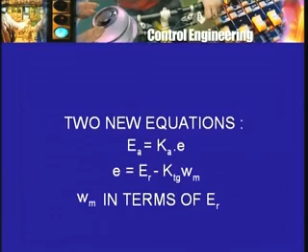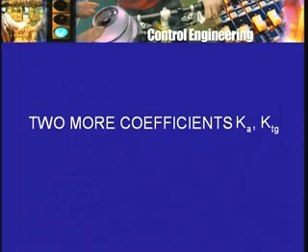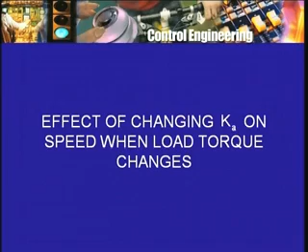In this expression what other terms will appear? The parameters of the drive will appear, that is, the armature resistance, KB and KF, the coefficient of friction, will appear as before, but in addition we have two new coefficients. We have the so called gain of the forward path Ka, which relates the armature voltage to the actuating signal E, and the feedback signal coefficient KTG, which relates the feedback signal to the output quantity omega m. So we will have two more coefficients, Ka and KTG, and what I asked you to do was to see the effect of changing this Ka on the value of omega m when the load torque changes.

When the load torque is at the rated value, the motor will run at the rated speed, there will be no steady state error. Therefore the value of omega m will be the desired value of the motor speed. But when the load torque is not at the rated value, then the speed is going to change. The question was by how much, and in what way will this coefficient Ka affect the steady state error in speed when a disturbance takes place. This disturbance is a change in the load torque. Of course the other coefficient, K tacho generator, which appears in the equation for the feedback signal, also will affect the steady state error.

Now, as I said, these are all steady state calculations, and this is not enough, because the conclusion that we will draw from this steady state analysis will be that the greater Ka is, the less will be the steady state error, and therefore one would be tempted to increase Ka to as large a value as may be practically possible, in the hope that the steady state error will be reduced to a very, very small value.

But I mentioned that this Ka has an effect on the transient error, and we have not looked at the transient performance so far, and that is something which has to be looked into, and we will do that. But before we do that,

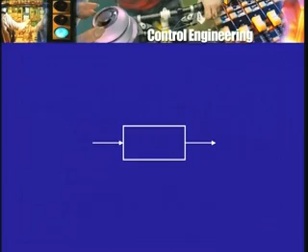The gain formula, as I told you earlier, arose out of Mason's study of signals, that is various physical quantities that are associated with a system which consists of a large number of interconnected subsystems. At that time already the idea of a block diagram was commonly being used, so that was not anything new. Engineers had started using block diagrams such as we have already used. And as I told you, the block diagram really enables us to concentrate on only a few signals associated with what is represented by that block.

For example, when we represent the motor and the load by a block, perhaps the only relevant signals, as we saw, were the armature voltage, the speed, the load torque, and perhaps the armature current, if it might be of some interest or use. Other quantities we don't write explicitly. Also, with this block, ultimately we will simply associate an equation or two equations which express relationships between these signals. Now, the technique introduced by Mason goes a little further.

One can look at the simplest case where you have only two variables or only two signals or only two quantities associated with some device or with a system. You can think of one of them as the input quantity and the other as the output quantity, depending on what particular significance those quantities have.

But if you are only interested in the relationship between these two quantities, then sometimes it does not matter which one is regarded as input and which one is regarded as output, if you do not mean by input and output literally that input is what you are going to change in order to make the output change in a certain way.

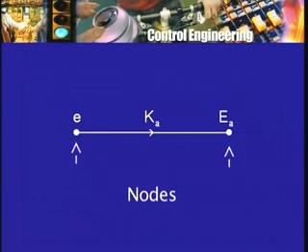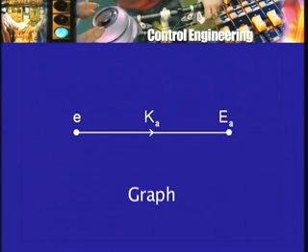The two ends of the arc, those points are called nodes, because what we are going to draw almost looks like what is called a graph of an electrical circuit or network, and in that context one uses terms like node and arc, or sometimes branch. One talks about a branch of an electrical network, and the nodes are the points where a number of branches are connected together. They are the connection points or junction points of the electric network.

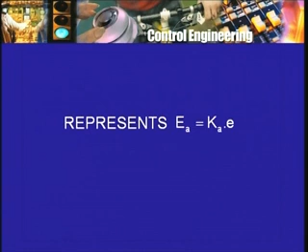So, what we have right now is a single arc or a single branch with two nodes. One is labeled small e, the other is labeled capital Ea. There is an arrow on the branch, and alongside there is the symbol Ka. All this is supposed to represent the relation Ea equal to Ka into e. The block did the same thing in a different way, Ea equal to Ka into e on the block diagram.

This new method, if one knows it and understands what it means, gives exactly the same information, Ea equal to Ka into e. So you can have the block diagram, you can have this single branch, and you can have the equation.

They all are ultimately related to one another. Now, if this was the only thing, then there is hardly any point in even drawing a block diagram or this kind of a graph with only one relationship and only two signals. One might as well write the equation itself.

But of course, in a practical case, we just do not have one block. Already in our motor control example, we had a number of blocks, and therefore we will have a graph which will have not just one branch but a number of branches, and not two nodes but more than two nodes.

Such a graph, because it represents really something that has to do with signals, was called by him a signal flow graph. The word flow is not to be taken literally. It is not that along that branch something is flowing from one end of the branch to the other. So, do not interpret it that way. The symbol KA that is put alongside the branch is not something that is flowing through that branch at all. Neither are the two labels that are associated with the nodes flowing through that branch in any sense of the term.

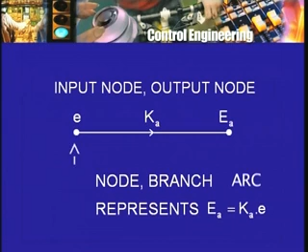Now these two nodes E and capital EA, there is an arrow. E is going to be called the input node and the other node is going to be called the output node. The arrow points from the input to the output node. Now as I said earlier, these terms are not to be taken literally, that something is being put in at node E and something is coming out of node EA. It is not that which is communicated by this terminology of input and output.

In fact, once I have that arrow there, I don't have to call E input and EA output. I can simply say node E or quantity associated with that node, that is E, and quantity associated with the other node, that's EA. The relationship is EA equal to KA into E. Now which way is it to be written? I have written EA equal to KA into E. I have not written E equal to KA into capital EA. That is told by this arrow, and that's the only function of the arrow here.

The arrow tells you that the signal at what is called the head of the arrow, EA here, equals this symbol KA, and this is called the transmission coefficient. Unfortunately, there is no transmission taking place, but there are analogies or other situations where there may be some transmission or flow taking place. We can simply call it the branch gain, but sometimes it is called the transmission coefficient or transmission, multiplied by the signal at what is called the tail of the arrow.

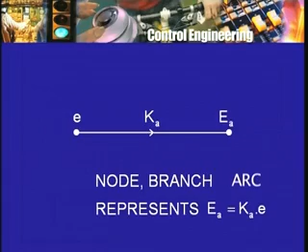The arrow has a head and the arrow has a tail. The signal associated with the node to which the arrow points, on the head side of the arrow, equals the transmission coefficient or transmittance or gain of the branch, multiplying the signal associated with the node at the tail end of the arrow. So this is the simplest block in the closed loop system that we are looking at.

Armature voltage is just a gain times the error signal E. Now let's look at the other parts of the system, and simultaneously you can look at the block diagram and see what are the things that we are going to do.

Now the block that represents the motor is a little complicated, although earlier we just showed one single block with EA as the input, omega m as the output, perhaps the load torque also as an input, and armature current as another output. And that was because there were two equations that we could write relating these various quantities, and it was enough to think of them together as one single block.

But now, since we are going to use this idea of a signal flow graph, we will have to break it up into parts and then build up the graph from these simple parts.

So for example, look at the armature circuit equation EA equal to the back EMF coefficient into omega m plus RA into IA. So it says that some signal armature voltage is a sum of two other signals, something which is called the back EMF, which cannot be really measured when the motor is in operation, and something called the armature drop, which also cannot be measured separately when the motor is in operation.

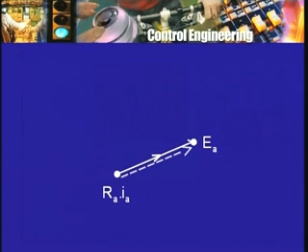Now, what does this say? Well, suppose that RAIA branch was not there, then you would have simply EA equal to KB omega m. On the other hand, suppose the KB omega m branch was missing, then you will have only EA equal to RAIA. But now we have both of them present. So, simply interpret EA as the sum of these two.

So, at the node, when there are incoming arrows, you have to assume that a summing action takes place, a sum is formed, and one can describe it by saying that the signal associated with the node is the sum of all incoming signals. In our case, EA equal to KB omega m plus RAIA.

Is that quite correct? Not really, because on these two edges, along with these two arrows, I have not indicated their transmittances or gains. So, if I want to be really correct about it, I will have to put down 1 and 1 alongside each of these branches. So, the node KB omega m is connected to EA through a branch with gain 1, the other node is connected also to EA with gain 1, the arrows are as shown.

Therefore, EA is the sum of the signals associated with those two branches whose arrows point towards EA, multiplied by the gains, in this case 1 and 1 each. So, in this way one talks about incoming signals. For EA, KB omega m and RAIA are the incoming signals, and this node not only stands for EA, but it also stands for this equation EA equal to KB omega m plus RAIA.

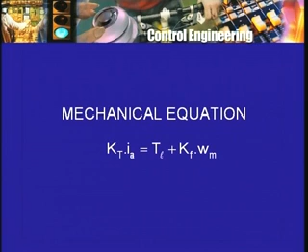Well, if we go by what we did earlier with the armature equation, maybe I should take KTIA as one node, that is one signal, and that is equal to TL, so show that as coming in, and Kf omega m as the other signal that is coming in. And certainly that is possible, it is possible to do it that way. So I will show it.

KTIA is the node to which these 2 signals are going, TL with a gain of 1 and omega m with a gain of Kf. Nothing wrong with this. This stands for the equation KTIA equal to 1 times TL, that is just TL, plus Kf times omega m, which is exactly the equation that we had. Notice that TL and omega m appear as some kind of input signals in this signal flow graph, and IA appears, or KTIA appears, as an output signal.

Now as I said earlier, the load torque, is it an input quantity or is it an output quantity? It is certainly an output quantity in a practical sense. The purpose of the motor is to produce load torque. The output of the motor is the torque or motor torque, if not the load torque. That is the output of the motor. So I am showing here TL as an input, but as I said, these words input and output do not have to be taken literally.

For us, when you have a line with an arrow, then one signal is called the input and the other is called the output, and all that matters is the relationship between the 2 signals, and the arrow tells us which way the relationship is to be written.

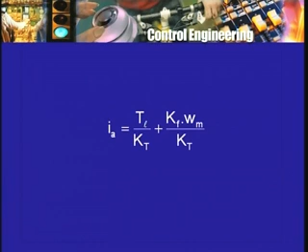That is about all. But I can go a little step further, and instead of writing KTIA, because KTIA is the torque produced by the motor, but again I am not interested in the torque produced by the motor as such, I could get rid of that coefficient KT by dividing that equation by KT. So in other words, I take the equation as IA, the armature current, is equal to TL divided by KT plus Kf omega m divided by KT, and therefore I can draw a graph where IA is the output node.

There are 2 input nodes, load torque and omega m, and with the corresponding gains, the gain from the load torque is 1 divided by KT, and the gain from the speed of the motor is Kf divided by KT. So this represents now the second equation, and now I can combine these 2 separate parts that I drew earlier. There was this equation for the armature voltage, and there was this equation for the armature current, and I can combine them.

I can combine them by simply superposing, except there is one condition that has to be observed, or one restriction that has to be followed, and this is one of the, if you feel it is a limitation of the signal flow graph, because each node will not only denote a voltage or a current or a signal in general, each node will represent or denote or stand for a signal, but because a node may have more than one incoming arrow, each node also stands for a sum or a summation.

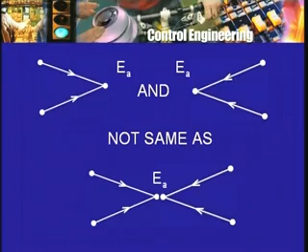Therefore, each node can only represent one equation. Each node can represent only one summation equation. So, you cannot have two equations, let us say showing EA as a sum of two signals and another equation showing EA also as a sum of two other signals, because then the same node will be doing this double job. And if I have a node with not two but four incoming arrows, then by this convention EA is the sum of all those four incoming signals and not E equal to sum of two incoming signals on the one hand and also E equal to sum of two incoming signals on the other hand.

So, because of this dual use of the node, node denotes a signal and node can also denote a summation or represent the operation of summation. This is something we have to take care of. So, with this in mind, now can I combine the two signal flow graphs that I drew earlier, the graph for the load torque omega m as input nodes and in turn they determining IA is the output node, and omega m IA as the input nodes and they in turn determining EA as the output node.

Is there going to be any problem in superposing these two diagrams? Well, there is none, although we will see that that is not going to be that useful and we will therefore change the diagram. But one should know the reason for making these changes. It is not simply that the book draws the diagram in a particular way and therefore all you have to do is copy it in that way. You should understand why diagrams are drawn in a particular way and why not in some other way. So, let us combine the two diagrams.

So, I have TL as one node, omega m as another node, IA is the armature current and there is that equation. I am putting down the gains 1 by kT here and kF by kT there. So, that is one equation. IA output node signal is the sum of two input nodes multiplied by their transmittances, that is the torque equation. Then this IA in turn is an input node affecting EA through a transmittance RA, and there is omega m also, and therefore I will draw another arrow from omega m to EA with a transmittance of KB.

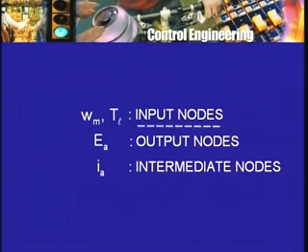In fact, EA is the physical input variable to the drive, and so we have sort of turned upside down the input and output quantities. EA should be the input, that's now appearing as an output node. Omega m is the output, that is appearing as an input node. IA is an intermediate quantity, yes, because IA is neither an input nor an output quantity. It is not directly of interest to us.

The load torque TL, however, appears correctly as an input, although from a practical point of view it is the output of the drive, or it is what the drive produces. But when looked upon from the point of view of disturbance, changes in TL are disturbances which can act like inputs, unwanted inputs, unknown inputs to the system. So having TL as an input node is okay, but having EA as output and omega m as input is not quite satisfactory.

And therefore one can try to change the signal flow graph, as we will, but let me repeat, the graph as we have drawn is quite correct. There is nothing wrong with it. Because there are two nodes which are not input nodes and therefore have incoming arrows, the signal flow graph represents two equations. And what are those two equations?

Look at the node EA, it has two incoming arrows, therefore EA equals the sum of the incoming signals. One of the arrows has at its tail IA, so IA into transmittance RA is one term in the sum. The other arrow has at its tail omega m, so omega m into KB is the signal coming along the other path, and therefore EA equals KB into omega m plus RA into IA. So this node not only represents the voltage EA, but also an equation. And that's the equation we had written earlier. Nothing wrong about it, therefore, as far as the graph is concerned.

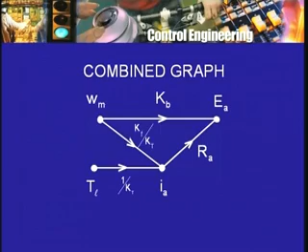You will not find this diagram perhaps in your textbook, simply because, as I said, here omega m appears as an input quantity and EA appears as an output quantity, whereas I may wish to see them in their opposite roles, EA as input and omega as an output. But the signal flow graph is quite correct. It represents the two equations 100% correctly. There is nothing wrong with the signal flow graph.

But can we make some changes or draw another graph in which EA may appear as the input quantity and omega m may appear as the output quantity? And this is what I want you to remember and realize, that if I have an equation, I can represent it on the signal flow graph in one particular way, but I can represent it in a different way also. And there is nothing wrong about doing it.

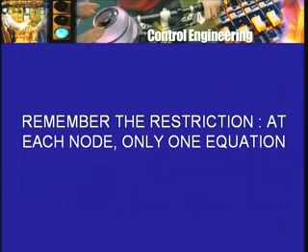The only thing that you have to remember is that at each node there is only one equation. So you can't have a node variable equal to some particular summation and also equal to some other summation and represent this on the graph by all arrows coming in, because then by convention that signal will be the sum of all incoming arrows. So that is the only restriction in drawing signal flow graphs, and therefore one has to take care that at each node we will have only one equation. Nowhere should it happen that you are trying to represent two equations by a single node.

Alright, so let us look at the armature voltage equation, EA equal to KB into omega m plus RA into IA. How can I rewrite this equation and then draw the corresponding branch of a signal flow graph? The way it was, we just took omega m and IA as the incoming nodes, EA as the output node, and therefore drew two branches going from omega m and IA through transmittances KB and RA to the node EA.

But now if I decide that I would like EA to appear as far as possible as an input node, because physically when I want to think about the drive, I want to think about the armature voltage as an input variable, then I would like to see EA as an input node, and therefore that will not be the node with which the equation will be associated.

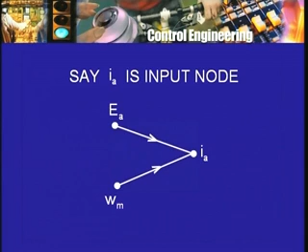So one way will be, we start with EA as an input node, omega m as another input node, and therefore IA will be my node which corresponds to this summation. And what will be the transmittances? Going from EA to IA, what will be the transmittance? What I have to do is take this equation, solve it for IA in terms of EA and omega m, and then show the gains or the transmittances on the signal flow graph.

So you can see that for IA, the transmittance coming from EA will be 1 by RA. Why? Because if I take this equation and try to solve it for IA, by taking IA to one side, I get RA IA equal to EA minus KB omega m, and now I express IA in terms of the other two. So I will get IA equal to 1 by RA into EA minus KB by RA into omega m. The gain or transmittance from EA to IA is plus 1 by RA.

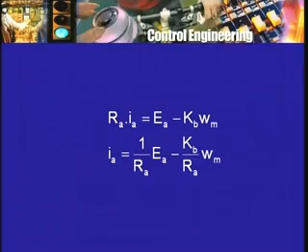So it's good to do it slowly rather than look at that equation and try to draw the signal flow graph directly. The other coefficient, however, has a negative sign. It is minus KB divided by RA. So that armature circuit equation I can represent by this signal flow graph, in which EA and omega m are the two input nodes and there is a single output node IA, and this stands for that single equation. We can also do it choosing omega m as the output node and EA and IA as the input nodes.

Why don't you try it? What is to be done? I have to solve for omega m in terms of EA and IA. So transfer some other term to the other side and get an expression for omega m as some coefficient into EA, that will be the transmittance of that branch, plus some other coefficient into IA, that will be the transmittance

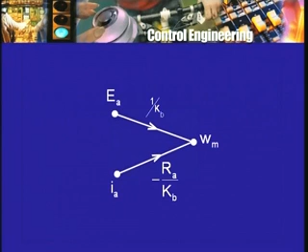of the other branch. So I could also have a signal flow graph with EA and IA as the input nodes, omega m as the output node, and with two transmittances appropriately chosen. So for example, from that equation, the transmittance from EA to omega m is 1 over KB, and the transmittance from IA to omega m once again has a negative sign, and it is minus RA divided by KB.

Now let me emphasize once again that both of these are correct ways of representing that equation, as was the third way of representing the equation, namely EA as the output node, omega m and IA as the two input nodes. So all the three ways are equally correct. Let nobody tell you that this is not right and that is right. Of course, what is more useful, what is not so useful, that will depend on what happens as we proceed further.

But at this point, what is important to note is that an equation can be represented on a signal flow graph in this particular way. An equation expressing one variable, one signal, as a summation, and by summation one means plus sign, all right, but a coefficient which may be negative, of a number of other signals multiplied by their transmittances. And so from those nodes draw arrows pointing towards this signal, which is the sum, show the transmittances along the various branches. This is the way of representing that equation on or by what is called a signal flow graph,

and there can be more than one way of doing this, and it's only experience, or what it means is that you try this, try that, then eventually you see that this is better than that, and then you can say to yourself, why did I not think of it earlier, and so on. But that's not the point of it. One should know that there are alternatives, they are all equally correct, and of course one should learn that this works better than that, and so on.

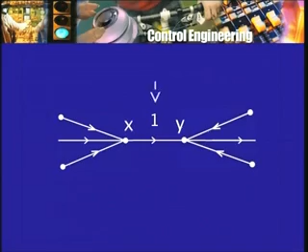Is there any point in writing down that equation, or therefore putting that branch with transmittance 1? There is really not much point, except this condition that we are insisting upon. If that is to be satisfied, something like this can be used or may be required.

So do this homework, and we will then look at what we can do with the composite signal flow graph. We will look at the statement of Mason's gain formula, apply it to that composite graph, and get a nice formula rather easily by looking at the graph and applying the gain formula. When I say easily, it means after you have understood and remembered Mason's gain formula correctly, and you can apply it to the particular signal flow graph correctly, and of course after you have drawn the signal flow graphs correctly.

So it is only when you can draw a graph correctly, first of all therefore you must write down correct equations to start with, then represent them correctly by the signal flow graph, then you must remember what the Mason's gain formula is, and then you must apply it correctly. If you do all this, then hopefully you will not go wrong, and you would have found out the desired equation or relations that we are looking for.